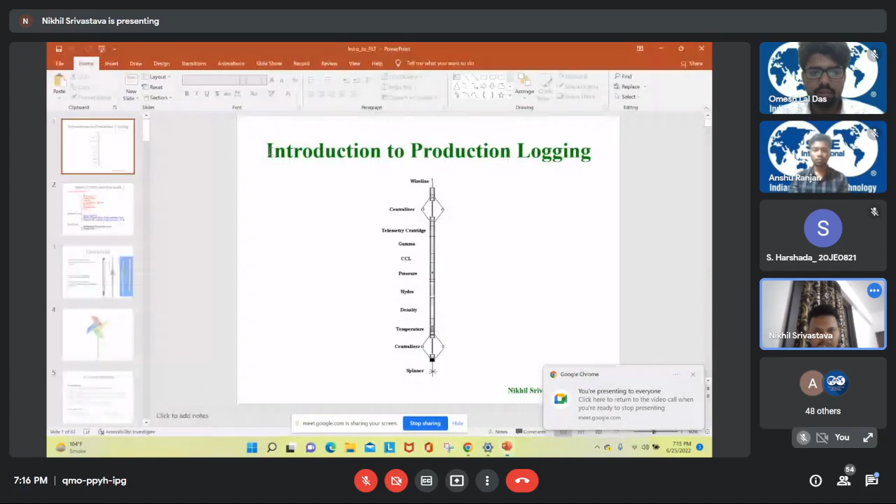Okay, I have stopped sharing right now. Shall I start sharing again? Yes sir, your entire screen. Okay, I have already shared my screen. It is presenting my screen right now. So can you see right now? Yes sir, clearly.

So I hope you guys can see this tool stack in the introduction slide. This tool stack has a few tools which are actually important in the industry. These are conventional tools basically, and most of its use is right now prevalent specifically in ONGC, and a few of the advanced tools are also there, which Schlumberger and Halliburton sort of companies provide, and a few assets like the Mumbai assets of our ONGC use it. I can share the technology of those advanced tools as well.

But the log and interpretation part, I could not share with you guys in this presentation because of some restrictive policy of ONGC right now. They cannot share the logs, and other specifically advanced logs of crucial areas like Bombay High, etc. So for that matter, I could not arrange that, but still we would look into the technology and its working principle.

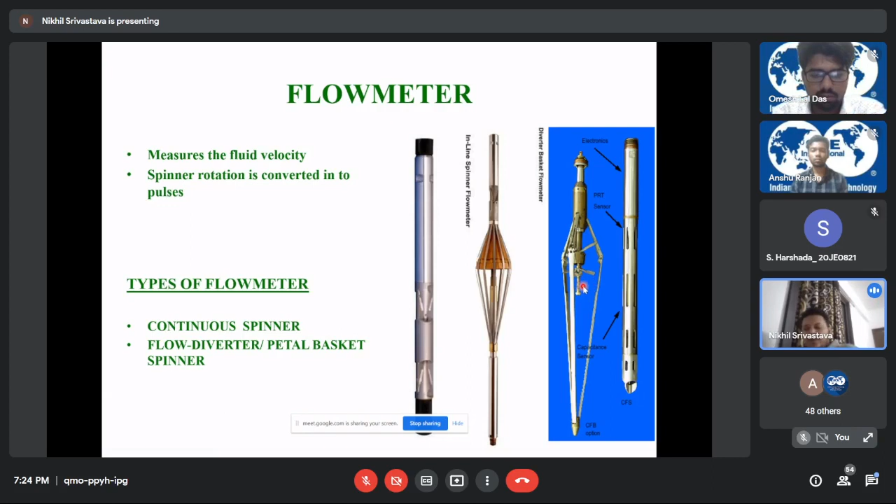Moving on to the next slide. To understand it better, you guys might have seen this paper windmill craft, which we all would have made in our childhood. Considering this, all the flow meters have four blades like this only.

What we would do in childhood is make it and run against the wind, so that it revolves faster and faster. We would run against the wind, and that's how we would play with it.

In a similar manner, if you think of this full bore meter, just sit on that full bore tool, and think that you are running with that full bore meter into the wellbore, and with that you can think of the revolution this spinner is doing in that manner.

One thing I want to mention here is that these tools are basically analogous to the medical field, just like radiologists do, or some diagnostic studies that are being done in medical study.

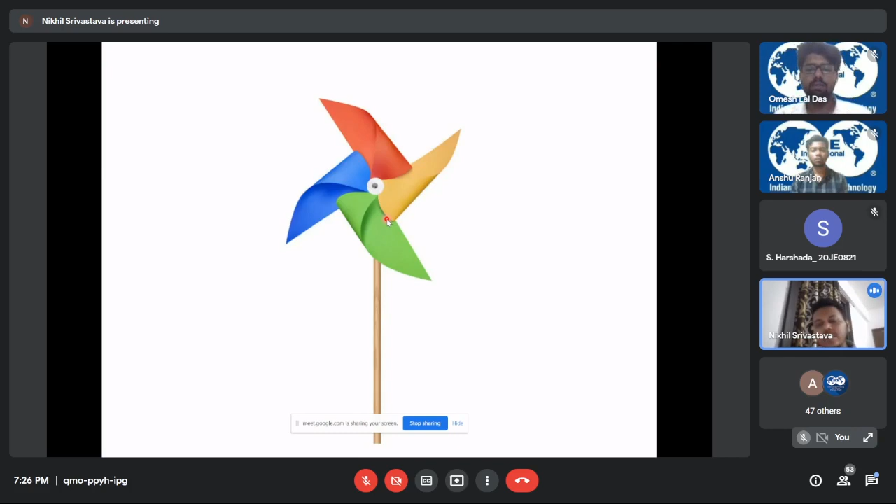You can think of these full wellbore meters as tools just to diagnose that, and after running them, interpretation of the data is very important. So moving on to the next slide.

Just imagine we are running the full bore tool into the wellbore. As soon as fluid faces this spinner, the spinner will start rotating in the clockwise manner. Industry-wide practice is to conventionally put this in the positive quadrant, so it's given a positive sign. When wind blows from the back, like a paper windmill, it will start rotating in the anti-clockwise or counterclockwise manner.

Similarly, if you sit on that tool in an injector well where liquid is coming into the wellbore, you will see the spinner rotating in the counterclockwise manner. That sign, by industry-wide practice, we take as the negative quadrant, so it's negative.

The measurement we get from this flow meter is pulse per revolution, which tells us how much it rotates. This spinner has a pitch, just like nut and bolts have pitch. One rotation of 2 pi r gives a measurement of one pitch, which sends a signal to the electric wireline telemetry that one pitch, meaning one revolution, has been completed. That's how it works.

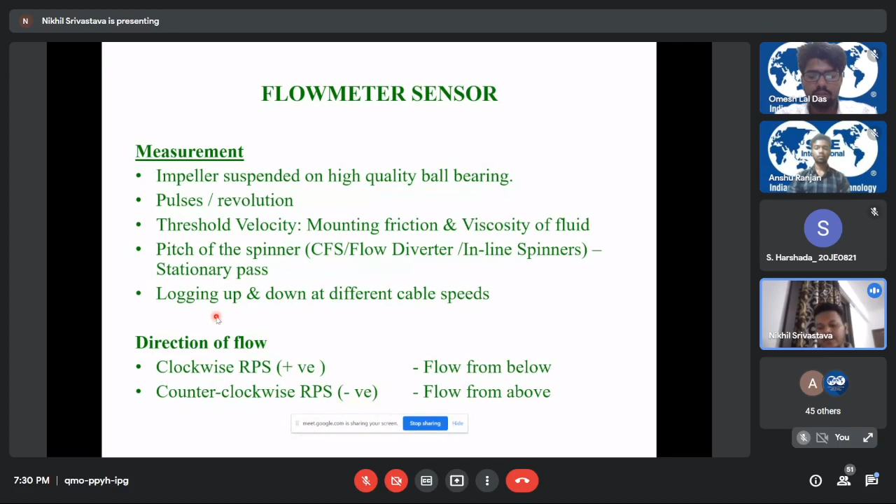Suppose there is no friction and no viscous drag force happening. What would you see when the tool is going down? Tool velocity down means the tool is going down, we are lowering it into the wellbore. As we lower it, the spinner will start rotating since there is no viscous drag force, so the revolution will be fine and proportional. Similarly, on the upward side, as I told you, this will be in the positive quadrant when we'll be going down.

This convention has been made in this calibration also. When the tool will be pulling up, similarly the revolution will be in the negative side, but we'll be seeing that it is proportional.

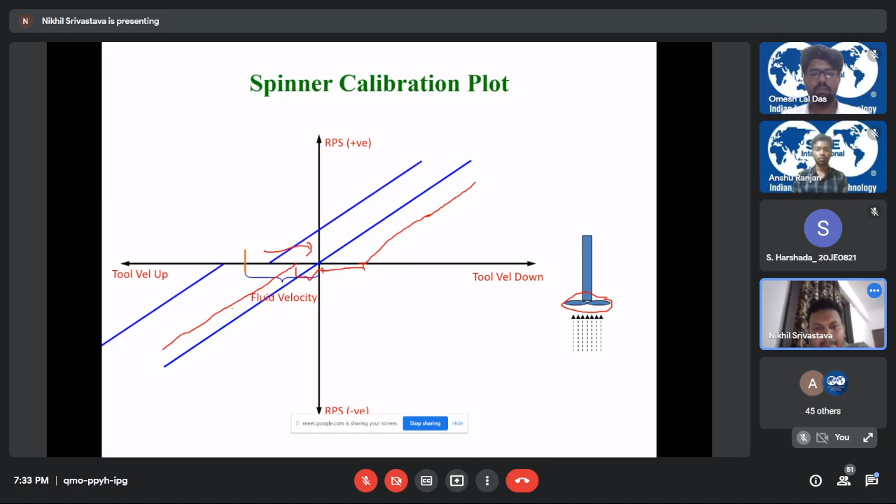In the next slide, I have shown that it actually varies with the fluid form, meaning what kind of fluid is in the formation. So for water, at the same tool speed, this revolution will be higher. For gas, this revolution will be lower.

Why? Because the viscous drag force that water will put on the spinner will be much higher. That's why the threshold velocity is low here. You can see the threshold velocity is some 10-ish here, and here it is some 5-ish. For that matter, gas is considered to have lower viscosity, so that's why it is giving a much higher threshold, and you can see the slope is a little bit steeper in the water case.

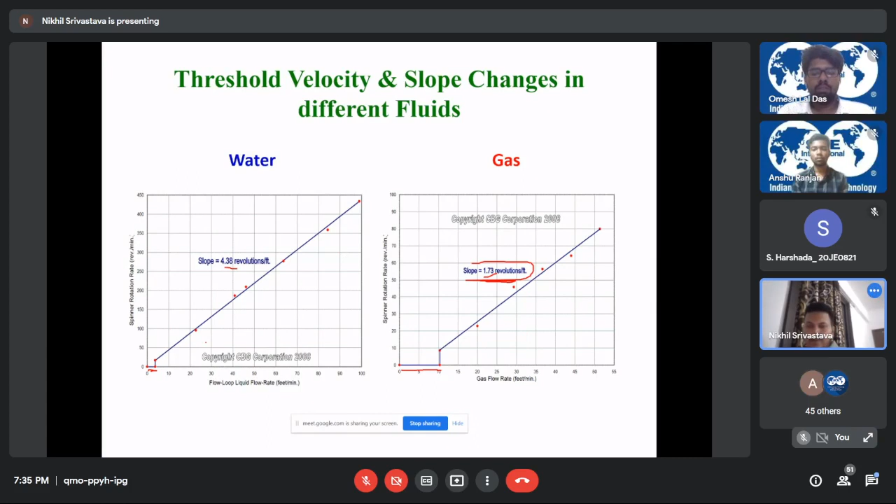It is not that gas flow rate is... you will have to have a lower spinner rotation for more gas flow rate. So this slide depicts that. For water and oil, it is not that much differentiable, that's why I've shown this slide for water and gas, because here it is clearly visible and clear.

These are the continuous flowmeters that we discussed in the first slide. This is inline, and there are some technicalities. I thought some geoscience background people would be here, so it would be important for them to know the limits of how these can be run, because reservoir engineers or production engineers in the industry give us a kind of requisition that you have to find out the problem.

So what we would do is first identify what kind of tool can be run, what kind of production is coming from the well, and whether the tool is compatible with that production or not. Such kind of things have to be decided by a petrophysicist or a logging field engineer. So in that case, it becomes important to know the tidbits of what your tool is, basically what its limits are. It works only for a threshold velocity of 10 feet per minute.

It works best for single phase flow, like if in the wellbore you are doing injection, it will be a very ideal tool to identify whether there is some leakage in the tubing or not, or whether some injection profile is proper or not. In that case, this tool can be run. In a production well also, if velocity is greater than 10 fpm, this can be run too. But mostly in the industry, it is being run in wells where tubing related issues are there, so that in those cases it gives us a better idea of what is happening in the tubings.

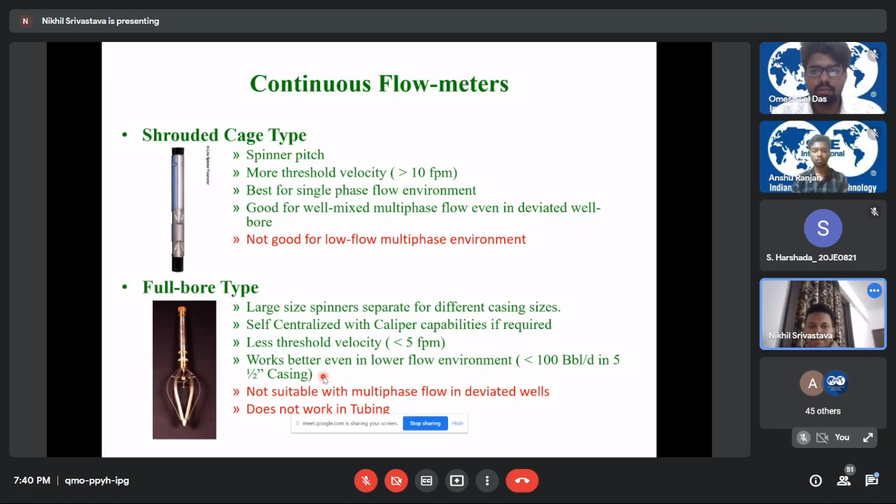But the one problem it faces in multi-phase flow is that the threshold of this spinner is a little larger. So in case of multi-phase flow, if it's gaseous, the multi-phase consists of gas, and in that case this full well bore spinner gives some kind of erroneous data. So we do not rely on it in deviated wells if it is multi-phase, and we rely on other tools. We'll see that there are other important tools.

This flow diverter, as I told you, is a motorized centralizer. This is good for low flow rate. As I told you, all the fluid volume once it extends, this particular central part works as the centralizer. So once it extends in the casing, you will see that all the fluid is going into this and it is being diverted, taking all the fluid volume.

But I would like to know from you guys, do you think it will give the true full bore flow rate? Because even if the fluid volume is coming into this particular spinner, the volume is significantly changed, so the velocity will be literally very high here rather than there. So in that case also, we do have some corrections and some industry-related empirical equations that we apply. You might be aware of this.

In physics, we would have read A1V1 equals A2V2, something like that. In the same manner, this is applied here also, and this velocity of fluid volume is calculated for the actual fluid that is in the wellbore.

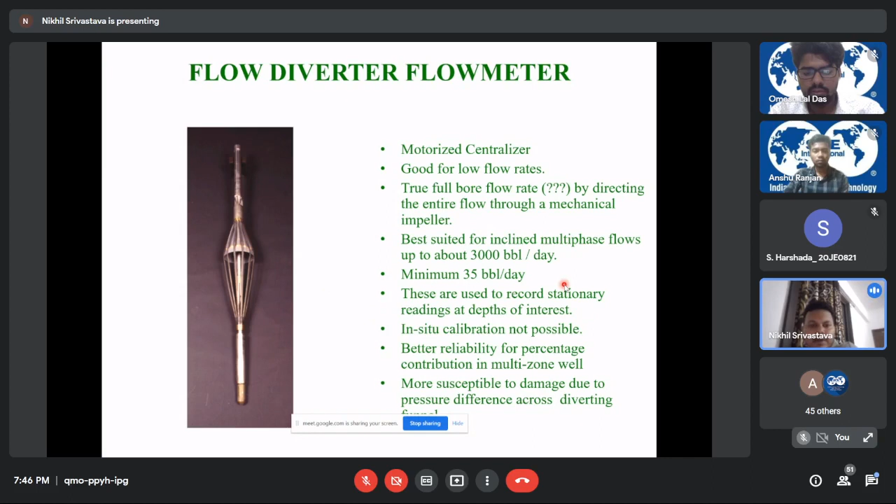As I told you, there are several perforation zones and you want to know the hold up, so it is reliable in multi-zone wells, but it is more susceptible to damage because it is motorized. Once it's in the wellbore, you'll totally have to rely on the motor mechanics of this tool.

So it might fail some of the time because well behavior is sometimes very unpredictable, and the flow patterns too. Let me show you these two kinds of flow: laminar flow and turbulent flow profile.

Generally, what happens is that our fluid in the wellbore, if it has pressure, you will find a kind of turbulent flow profile. For laminar flow profile, it is very rare - only when your flow velocity or the pressure in the well is very low can you think of having a laminar flow, near to laminar flow, but it is a very rare phenomenon.

Mostly we find the turbulent flow, so we do have to correct. What we are actually calculating is the fluid velocity, and eventually the fluid rate from that fluid velocity. So to calculate that fluid velocity, we would have to have a kind of correction.

This spinner is calculating the velocity of this particular area only. It is actually not covering this area or this area. Here also it is not covering this area or this area. So considering this as a kind of limitation, we would have to calculate the average velocity.

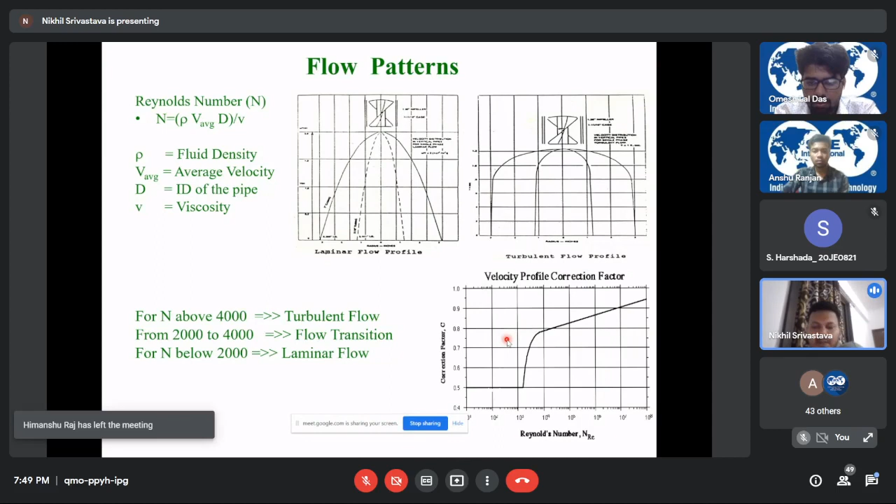Mostly in Mehsana, as I told you, it is 0.83, and it revolves around 0.6 to 0.9 for most of the fields of Mehsana and Ahmedabad.

So this is the flow meter environment. Fluid comes in different manners as they have different density and viscosity - these are intrinsic properties you cannot change. So there is a kind of mechanism that they follow to come up to the surface.

If this kind of flow is there, there are bubbles of gas and oil that you can see in the water. This kind of flow is called bubble flow.

And slug flow - when the viscosity of oil is a little bit higher, in that case it will come out on the surface in the form of slugs. It will be coming out in lumps, then water will come, then again a lump, then again water - it sort of comes like this only.

Again, when it comes in a little cruder manner, this is churn flow. We do not see this in Mehsana. Slug flow is very common, and bubble flow is also very common.

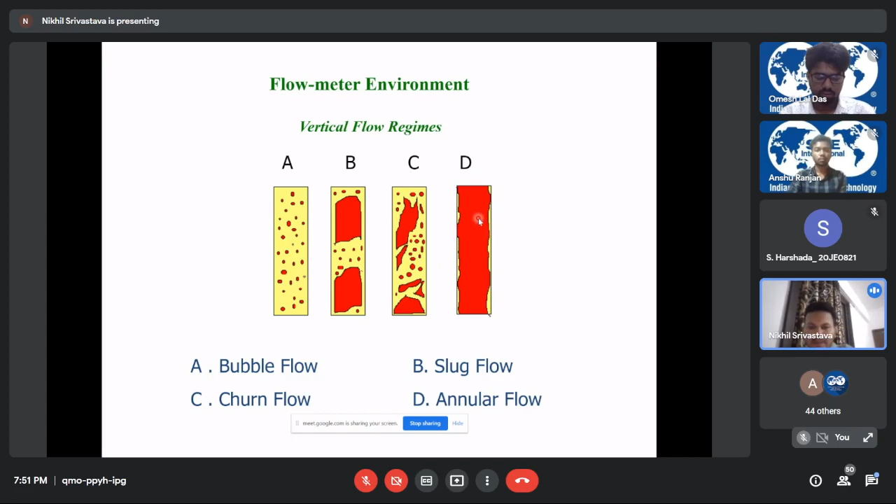Annular flow is basically when you have very low water hold up - in this case water will be seeping from the sides, and the whole volume of oil or gas will be coming from the middle. We see such cases also in Mehsana.

So there are problems in the deviated wells while running this kind of flow meter. You can see here that the perforation on the upper side is actually giving the production in the well. But what happens then if you have a sump below this particular perforation?

You will be having a kind of convection in the fluid flow volume. This will be coming from here with force, and after coming to the tubing packers, it will again come down to the tool. As it is natural due to gravity, the tool will be running on the lower side. So in that case, you will see that the tool is giving erroneous data.

Like you will be seeing that revolution is in the negative direction, and that too will come on your log profile. You'll be thinking that when centralizers are put here, what is the reason that this happens?

But this convection happens in the whole well, because on the upper side, due to gravity, the gas and oil go to the upper side, and that's why it comes below after touching this packer. This convection gives this kind of effect, and it gives the interpreters the understanding that some kind of injection is going into the well, but that is not the case.

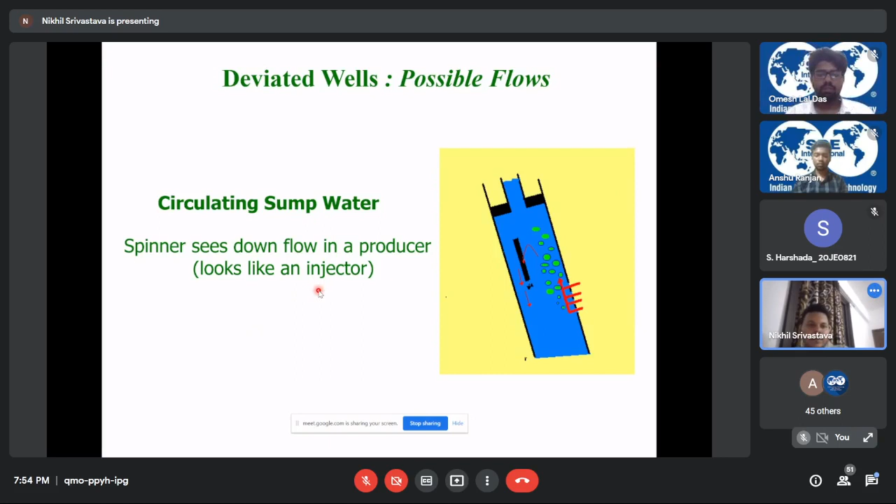But industrial tools are also being developed, and they take care of such kind of things, correcting it right there in the wellbore, and we do see just the positive response in those tools. So you have to give prior information of production, that yes, the well is in the producing profile, so circulating sump water, yeah.

Next, in the deviated wells, as I told you, oil and gas being lighter will be flowing on the upper side due to gravity. So sensors like in the hold-up hydro tools and density tools will give erroneous data, because they will not read the gas and oil as the average.

If you average it out, they will give mostly the correct order, but this is not the case. So in this kind of deviated wells, we do run some specific tools, as I told you, the inverted basket flow meter is a suitable tool to run in such kind of situations.

In this case also, you will not see that it is producing, but that is not the case. Again, such advanced tools, like the flow scan or something similar, will know the real scenario in this.

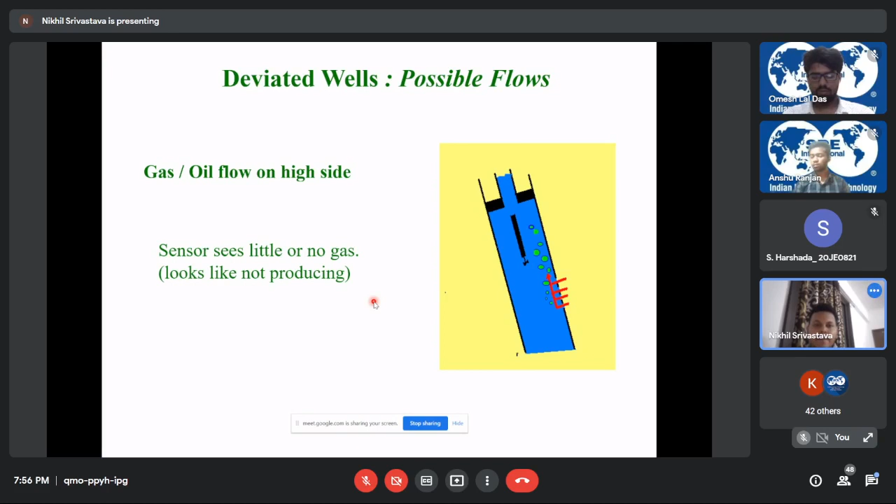That's why in such cases we ask Schlumberger and Halliburton to run special tools to identify whether there is an actual problem with the well, or there is no problem at all. It is just that the interpretation of conventional tools is somewhere compromised with the limitations.

So looking at limitations, we already discussed that threshold velocity limits the sensitivity of the flow. You have to have the threshold velocity that can run that flow meter, and velocity correction must be done with the Reynolds number calculation.

Noisy response due to type of flow - in single phase, noise will not be very much, but in two phase or multi phase flow, noises come in a manner that actually confuses our tool. For that we do have kind of remedies, but conventional tools do get confused with multi-phase more often than not.

Response in the deviated wells - we discussed already that due to fluid segregation from gravity in deviated wells, these conventional tools have limitations and calculate erroneous results. We must be careful, and as a logger, we recommend the requisition team from subsurface or other authorities, so that we can run other advanced tools from third parties like Schlumberger and Halliburton that have array tools and flow scanner tools that can give the whole picture of the well.

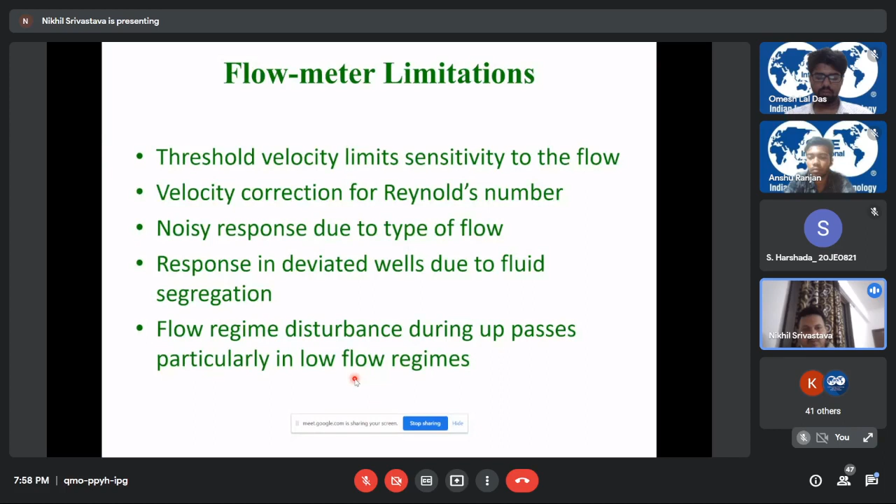With the production velocity, the fluid and the tool are also running in the same direction. So if a low flow regime is encountered, the spinner fluctuation will not be that much, and we will not be able to identify whether the fluid is static or actually coming from the wellbore. So in the up passes, we have to be careful to know that the production is good, more than 35 barrels per day or so.

Coming on to the next tool, that is the temperature tool. The temperature tool is basically a resistive thermal device, a non-conductive surface on which a metal, mostly tungsten or platinum wire, is bonded. It measures the change in resistance with this tool, and that change in resistance per degree Fahrenheit is recalculated to get the temperature.

This is a very awesome tool to know many of the things which a full bore flowmeter or diverter tool cannot give, like channeling behind the casing. This is a very basic and ideal tool to run to know such kinds of problems in the well.

It measures the absolute temperature. Temperature accuracy is very good, up to plus minus 0.2 degrees centigrade. Resolution is 0.1 degree centigrade.

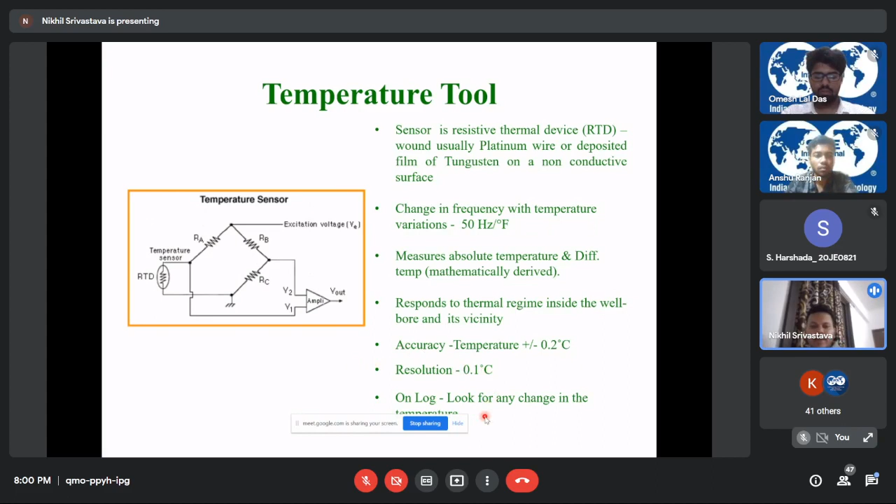In temperature logging, we take care that we always log it while running the tool down. We never run it while pulling the tool up, because there is no telemetry that can tell the temperature tool that you have to record now and you do not have to record now. It is just a simple device which is resistance based, and it calculates the difference and gives it in the form of frequency, which is then recalculated in the form of temperature.

So once your tool is down, it has already measured all the formation temperature. Your tool is conditioned with the temperature at the bottommost point, and when you take the up pass, this will not give you the geothermal gradient idea. In that case, you may get results, but you cannot rely on them, because every temperature curve that we log into the well is tied with the geothermal gradient.

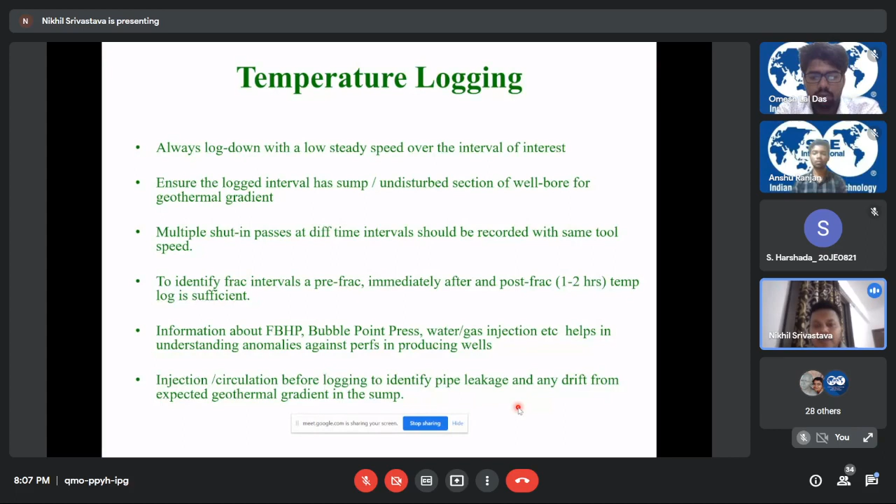Injection and circulation before logging helps identify pipe leakage. So suppose workover engineers and other production engineers have circulated some liquid or done some injection before running this temperature log. If you ask us to run the temperature log right after that, we would avoid it, because it will not give us the correct idea. Right after injecting or circulating the liquid, it disturbs the temperature equilibrium, and that will not give the proper anomaly. In that case, if you give us some time, like 4 to 5 hours, you can wait with your colleagues, and then we can identify the pipe leakages and any kind of problem happening due to poor latch of the tubing or something. So we can identify that with the temperature tool.

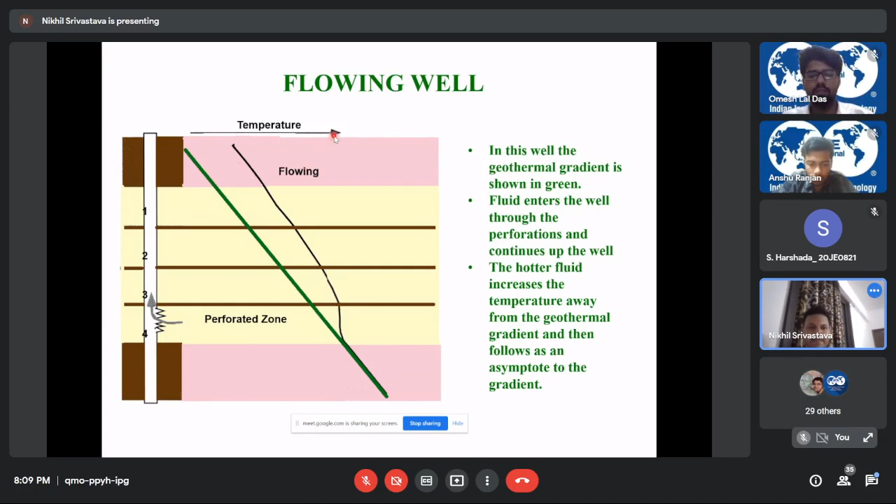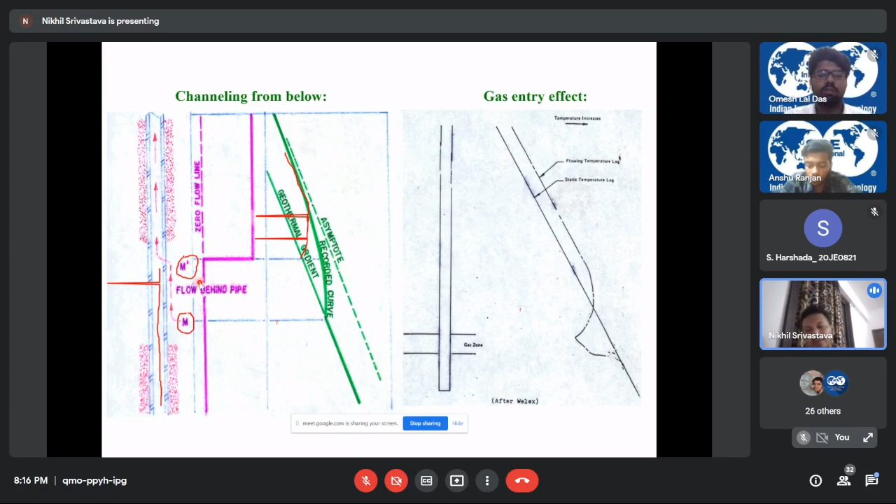That is always welcome, but the thing is that if it has suddenly gone from 3 meter cube per day to 30 meter cube per day, there might be some reason. So for that we can run this kind of production log and know the reason.

In case of gas channeling, you cannot identify it from the flow meter, it will again show just like that only. Due to static fluid run, there will be some RPS, and again it will increase against the perforation zone, but temperature will beautifully show you the cooling against this, where channeling behind casing is being done.

Again this will increase and try to attain the formation temperature, the formation geothermal gradient. But as you see, this gas has started coming from behind the channel, and here adiabatic expansion has started, and you will see again a cooling profile, and then it will go on increasing into the wellbore.

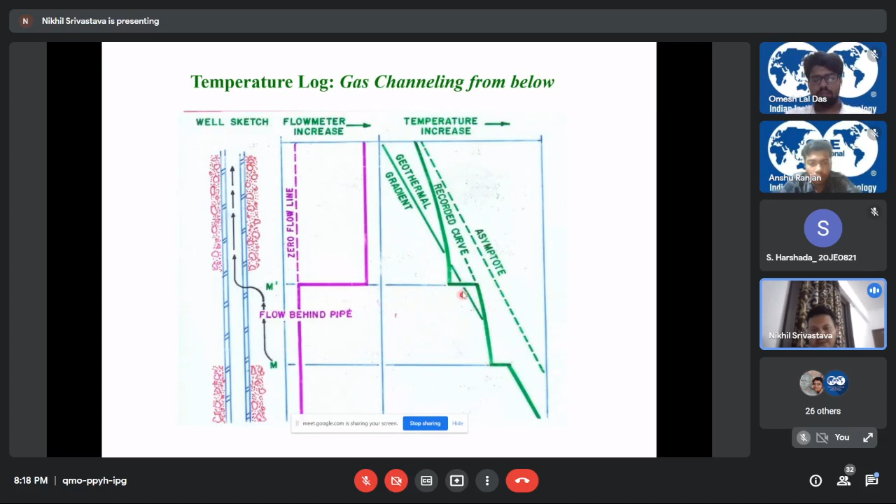So these two anomalies will tell you that yes, channeling is being done into the well behind casing.

There are other cases where you can run this temperature tool and identify casing leakages. Casing can leak due to several reasons, like corrosive gas coming in, or casings being very old and due to rusting it has got corroded, and there might be some contribution from that particular leaking zone.

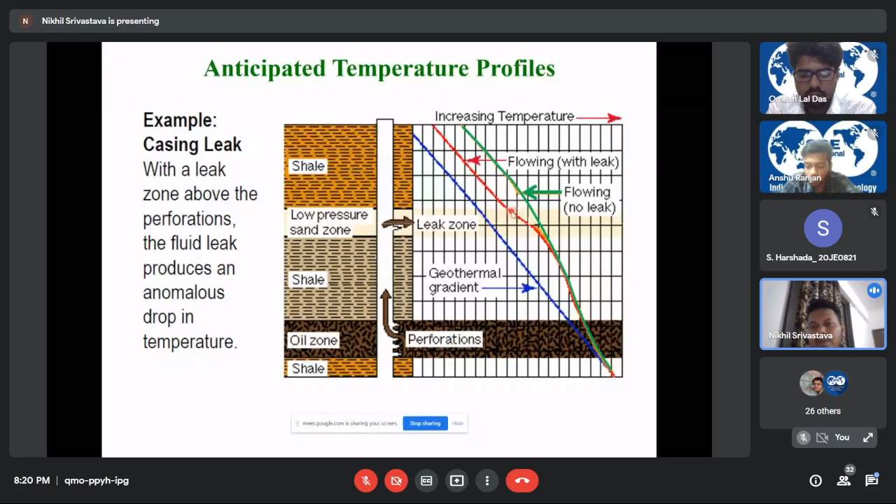This tool has a limitation that it will not give you holdup of water beyond 40% water cut, because in that case it will totally read the capacitance, dielectric constant of water, and this will give a kind of erroneous result that water is coming, 100% water, there is no oil. So there is a limit with this tool that you have to have less than 40% water cut.

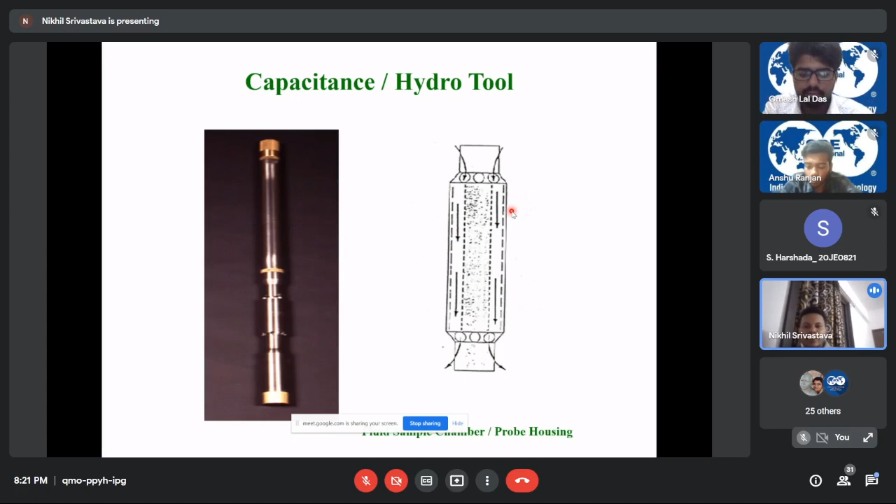In that case, a mix of liquid oil or gas with water will come, and this will identify the average dielectric values. Here you can see that for water, the dielectric constant is very significant, and it is not very identifiable between gas and oil, so gas and oil cannot be segregated, but water can be segregated from the hydrocarbon. So this actually can give us water holdup, but it is best suited for less than 40% water cut.

This tool basically works on the principle that there is capacitance, and due to the intrinsic dielectric constant parameter of every fluid, this capacitance changes. The output we get is in the form of frequency, which is converted to the holdup using an empirical equation on the surface when we get the log. The sensor is basically a kind of isolated metal cylinder with a Vespel sleeve inside, and there is a capacitor in it; between this, when the liquid passes, it measures the dielectric constant.

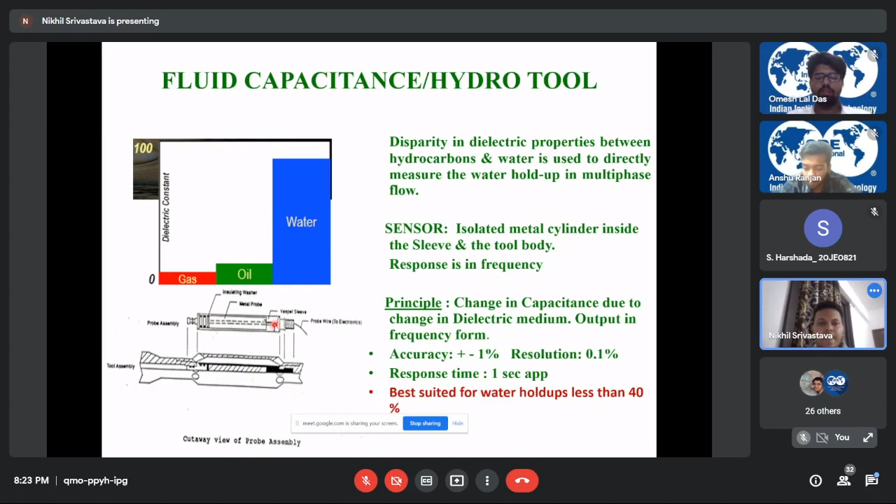That's it. So the tool principle is basically needed for people with a geoscience background. As petroleum engineers, you just have to know from the industrial point of view whether this tool will give you the water holdup, and that too for less than 40% water cut, which is nowadays very rare. Such cases are very few in brown fields like Mehsana and Ahmedabad, where water cut has gone beyond 60% or something. So this tool has eventually become obsolete, but we do use it in crucial wells, as I told you.

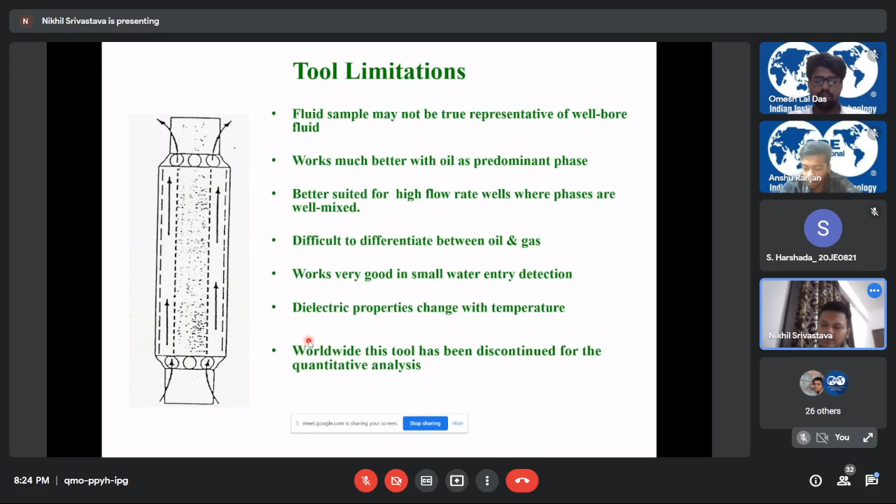So this is the fluid density tool. We have a density tool also, which is based on radiation and pressure difference.

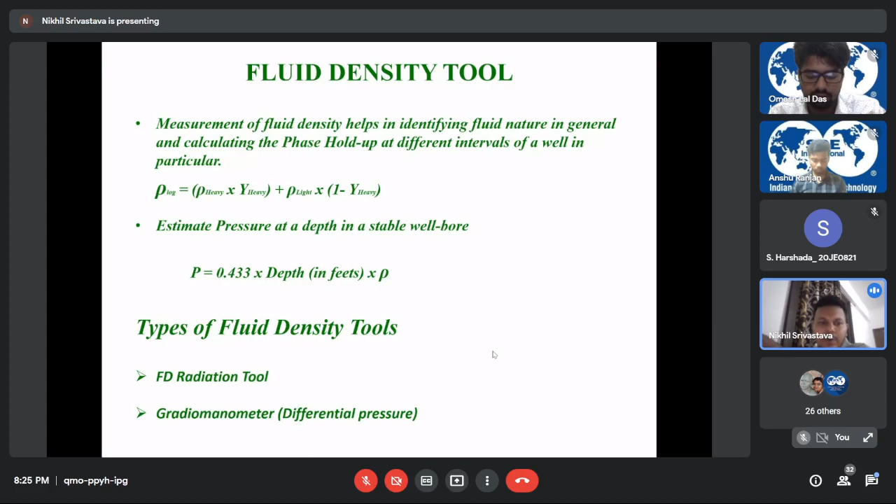The fluid density tool we use in Mehsana is of radiation type, and we use cesium 137 for that purpose. This is the empirical equation that the tool follows; we just have to run it, and it gives the bulk density.

This is based on the Compton scattering effect, where the gamma released from the cesium 137 source is bombarded on the fluid, and due to Compton scattering, it gives inelastic scattering. The gamma released from that scattering is recorded in the gamma detector. This gives the intrinsic property of the fluid in a way that there is an energy spectrum for those fluids, which is very unique for water or hydrocarbon.

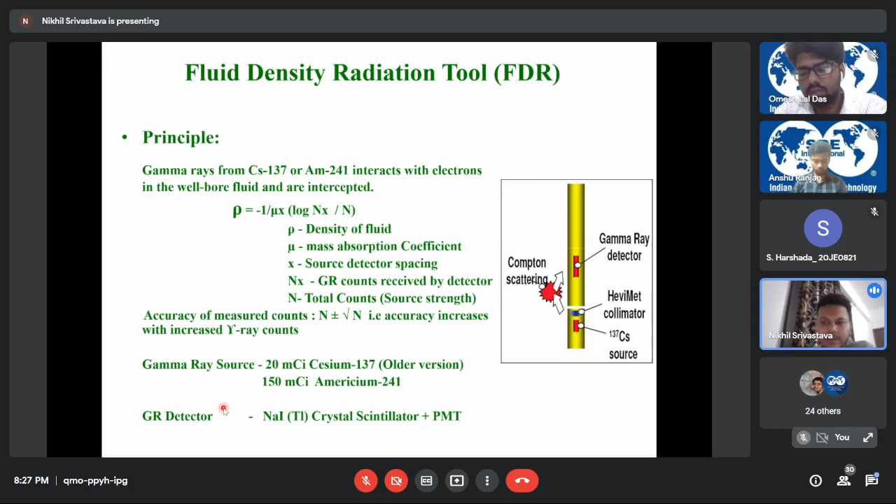For oil and gas, this tool measures density of fluids using a particular formula based on tool physics. This involves the mass absorption coefficient and source detector spacing. NX is the gamma ray counts received by the detector, versus the total counts, which is what the source actually bombards into the wellbore. That total count is based on the radioactivity of the source.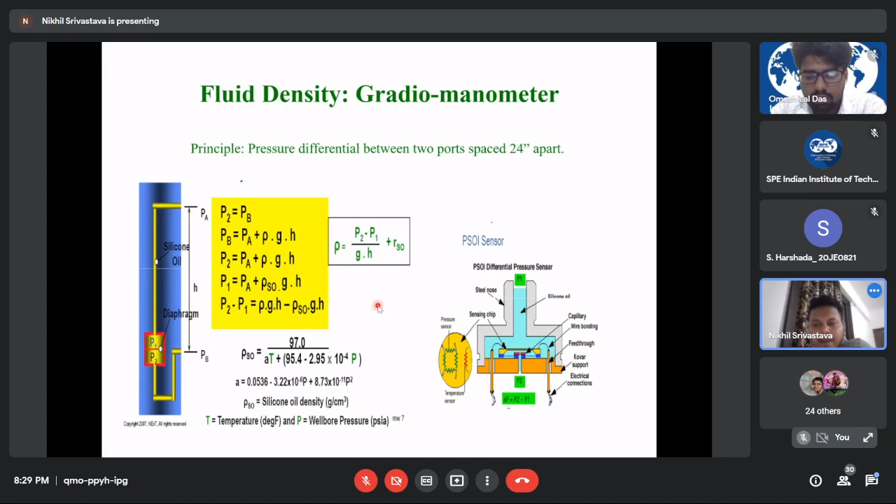If the density of oil coming onto the surface is known, and the density from the gradiometer has been calculated, we can also calculate the water holdup with this. In this case, we have a graph showing density of oil and the water point where 100% water holdup occurs. Once we calculate rho from the gradiometer, since this is a mixture of oil and water or gas and water, this gives an idea of how much water holdup is there. So this is one way of calculating water holdup.

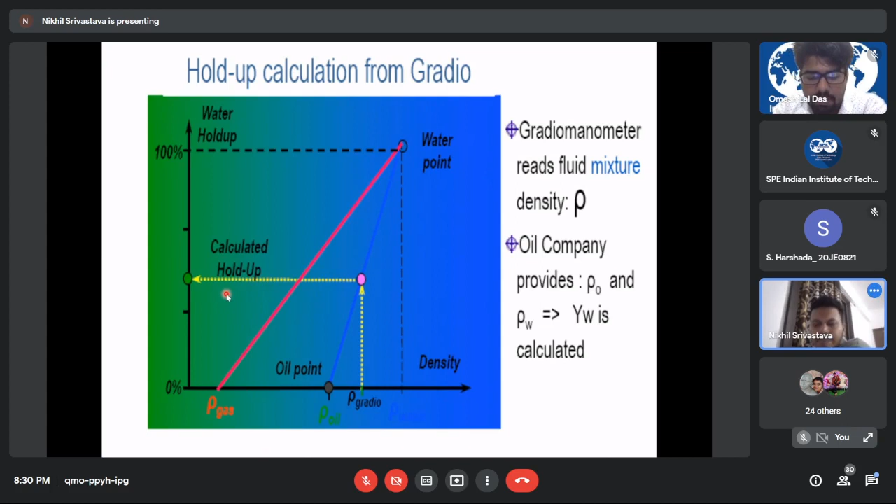But the gradiometer is not being used in the western region of ONGC, so I cannot comment much on that. The gradiometer is suited for vertical wells of low deviation, and it does not have much accuracy.

That's why we have purchased the radiation tool, which is equivalent to the density tool that is run in the open hole, if you might be knowing. So that is equivalent to that. Though the gradiometer is more rugged, and it can be run in almost any condition.

One important thing is that the gradiometer does not have any radioactive material, so organizations like BARC and other regulatory authorities don't require us to take their permission for it, unlike radiation tools. Every quarter, we have to take permission on whether we can run this kind of radioactive tools or not.

There are some regulatory bodies, like BARC, that keep records of this. It is just to control the radiation hazard that these regulations around radiation tools are important. We have to give the information about such tools to the authorities before running them into the wellbore.

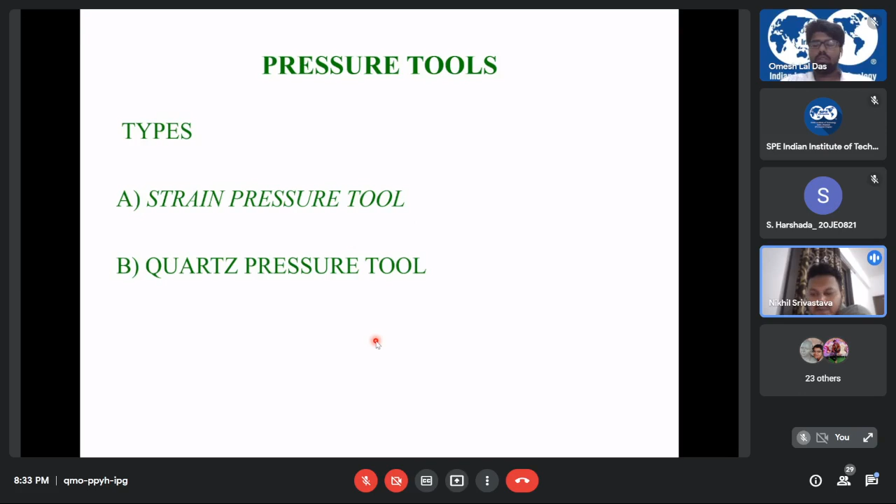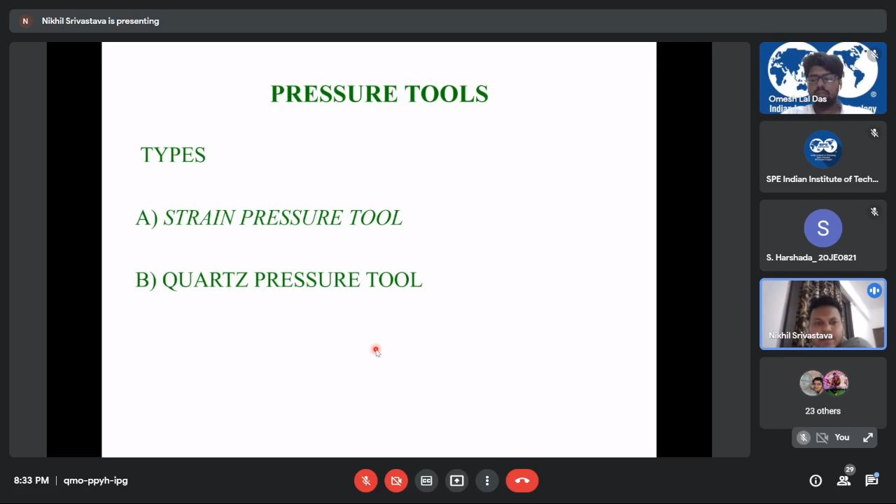Pressure tools include strain pressure tools and quartz pressure tools, two types that measure pressure in the wellbore. There are other methods that reservoir field services use, but nowadays in industry, the quartz pressure tool, which works on the principle of the piezoelectric effect, is mostly used. Strain pressure tools were used earlier but are not much in use now.

The principle is basically that the pressure-induced strain in the sensor causes a change in electrical resistance. That electrical resistance is recorded and sent to the telemetry, and through telemetry in the wireline, up to the surface.

In the software, the resistance is being converted again into pressure. So accuracy is not good, but strain gauges are less accurate, as I told you, that's why they are not being used much in the industry now.

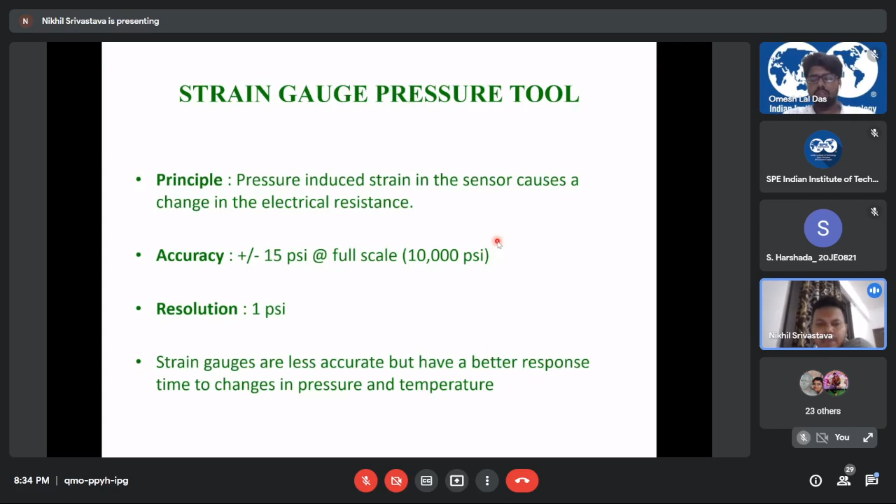Its response time is better because if you are having low flow volume, you would need a better response time to measure that, and strain gauges give that. In case of quartz pressure gauge also, you can use a strategy where you run it a little slower in the borehole where low liquid volume is coming out, so in that case you will also get a good response.

But that is a limitation, that this tool's response time is a little on the upper side. So you have to be careful to measure the pressure, and just slow down your running tool, and that will solve these kind of challenges.

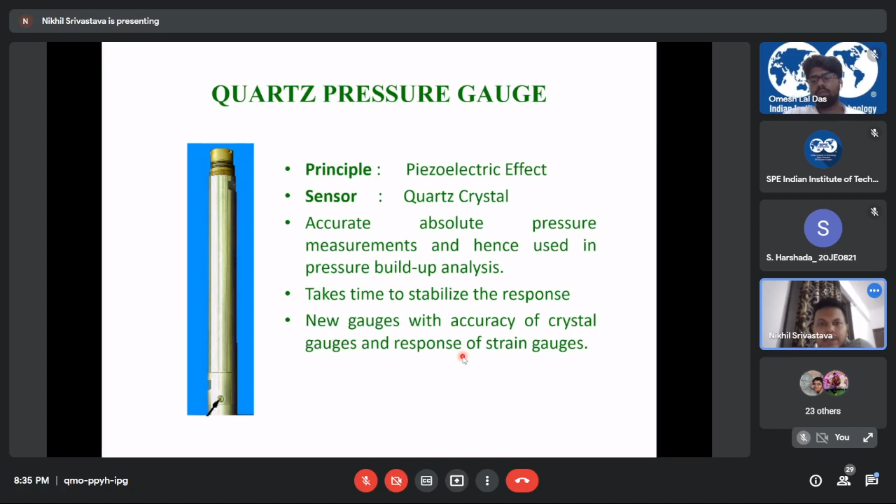Gamma ray tool is very basic. It has a scintillation detector. There is a natural gamma that every formation or every liquid emits. This gamma tool even records the gamma on the surface of the surroundings, but that gamma radiation is not very much of use.

That's why we correct for those environmental gamma, and we run this tool down to measure the gamma of the formation. This gamma is basically for the purpose to correlate the formation and tie up the depths, so that we know we are going right in the direction. That's why this tool is in the stack.

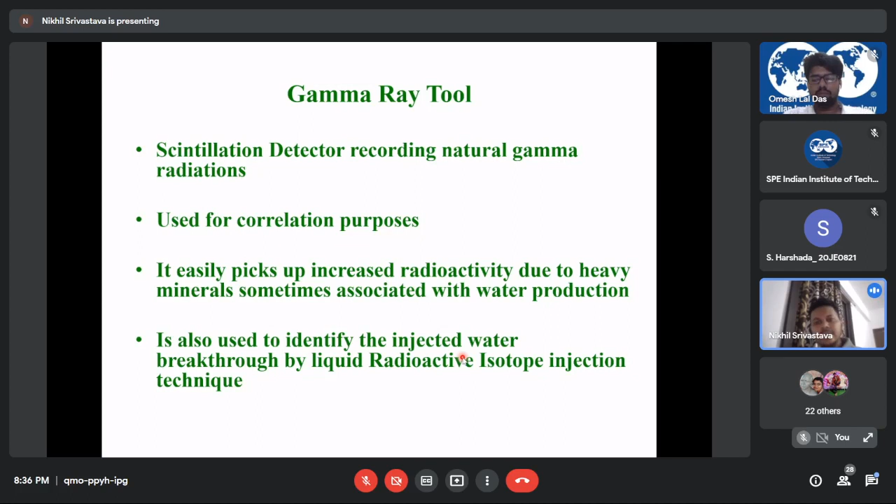Casing collar locator also gives the magnetic flux idea, and where the metal thickness is high it will give a larger magnetic flux, and that's how it gives an idea of casing collars, and also whether perforation is done somewhere, and whether there is a casing or tubing leakage. Some fluctuation comes in this due to the magnetic flux difference, but again that has to be re-verified with other tools.

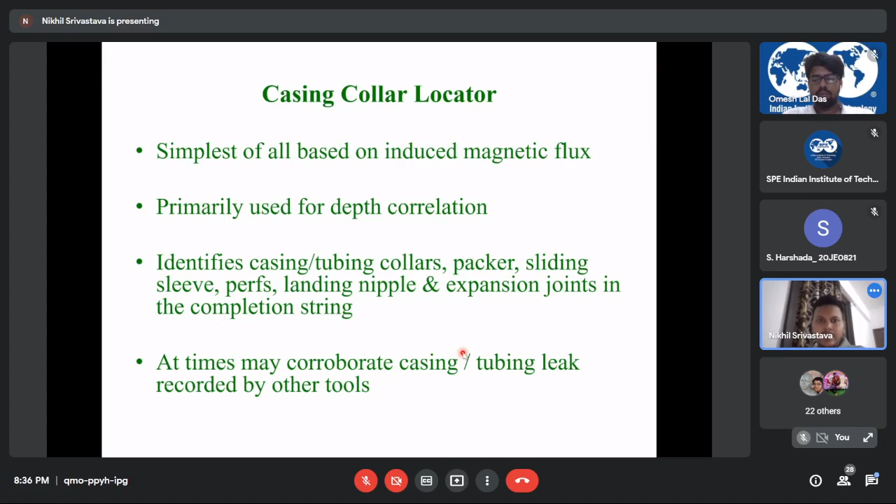This comes under the category of other tools, as I mentioned in the second slide. These radial differential temperature tools basically consist of two calipers, 180 degrees apart, with a temperature sensor mounted on these, and there is a kind of tool rotation that every tool has while running into the well.

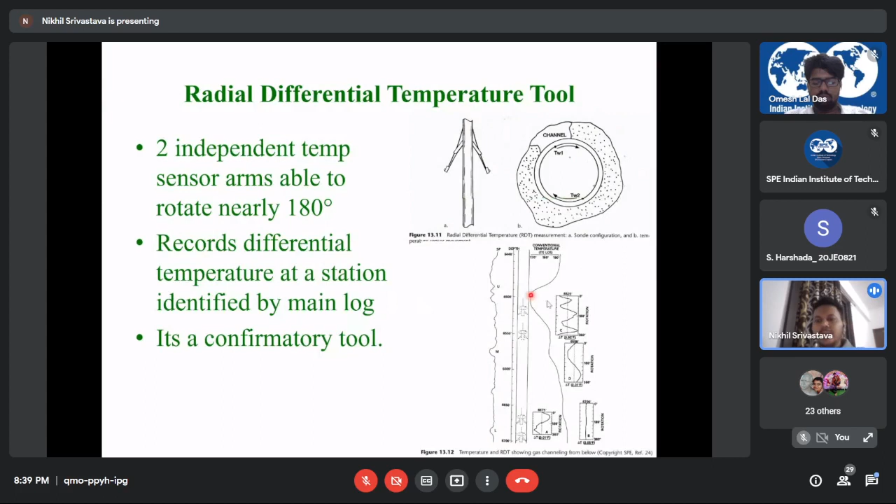Here there is a slight cooling phenomena, because the temperature slightly goes down, but again it has recovered. Here it is very straight, so there is not much cooling phenomena happening. This more or less resembles the temperature profile that we run with the original temperature tool, so this kind of tool runs for confirmatory purpose. There is no addition, but it gives a much better idea of in which direction the cooling is happening, even in the perforation.

Advanced PL tools - these four PL tools are widely known in the industry. First is GHOST, the gas hold-up optical sensor tool from Schlumberger, which is run to know the gas holdup. This is based on optical sensor flow view technology.

Time is actually a little less, so I would switch to the interpretation part, which is very necessary for you guys. I'm just briefing you on this. I will share the presentation with you so you can read it for the sake of knowing the tool principle. So this is based on optical sensor technology.

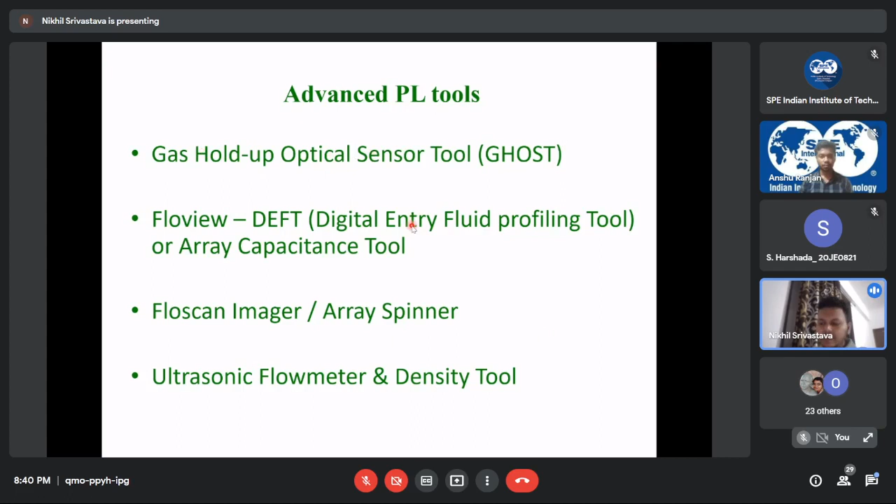What it does is, the flow of liquid into the wellbore is mostly in the form of bubble formation. So when the tool is run, a light source is bombarded on the fluid, and when this light comes out from the gas, water, or oil, it gives a certain refractive index. Because it reflects totally in case of gas, but in case of oil and water it is not very much identifiable, the refractive index of gas is very low, near about air.

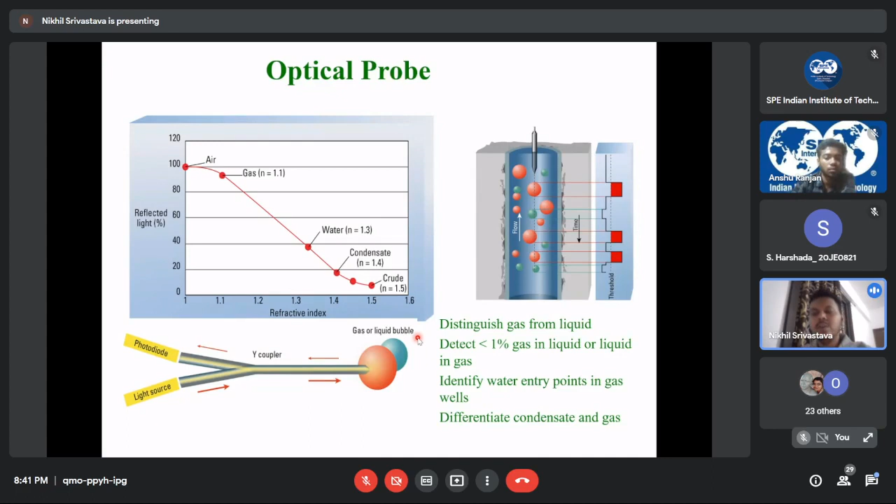That's why what comes out is the volume of gas, and that gives us the gas holdup. So in gas wells, this works wonders, and if one has to run a tool to know the solution gas in the well, this tool is ideal.

In digital entry profiling, there are micro resistivity tools mounted on the caliper. These tools basically measure the difference of resistivity between water and hydrocarbon, thus giving the holdup of water in this kind of multi-phase flow, because resistivity of hydrocarbon, whether oil or gas, will show on the higher side than water.

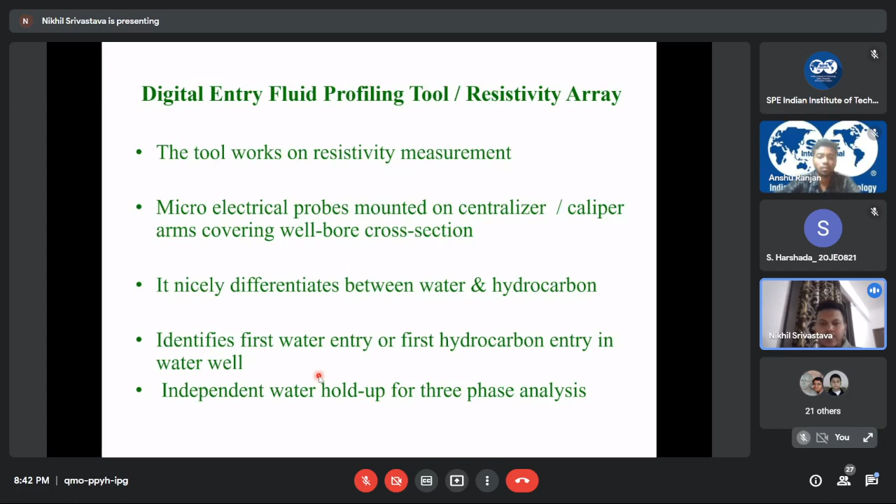So if the water is fresh - in case of freshwater formation, if it is coming from freshwater - then you would not get the water holdup properly. In that case the situation will be dicey, because water and oil would read somewhere equal, and it cannot give good results. So remember, the DEFT tool is for formations where the fluid water is saline, not for fresh water. Its working principle is the same.

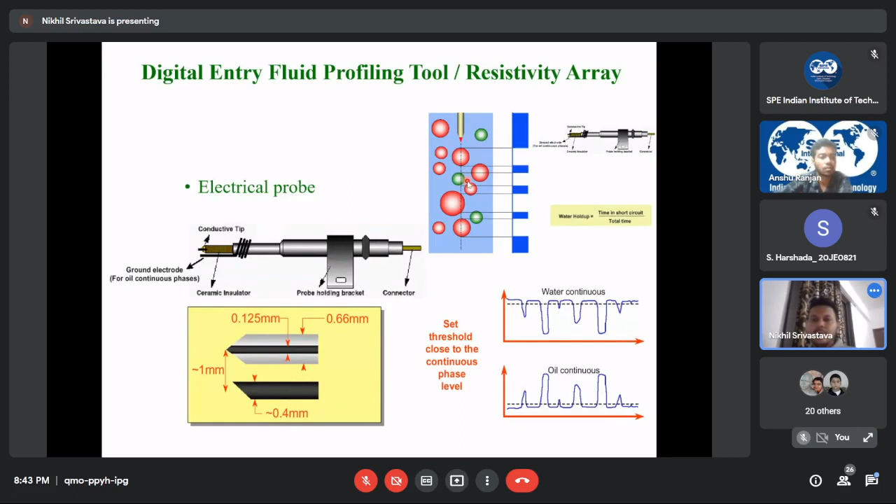Only in bubble flow, it will read the resistivity with different micro calipers, probe tools, and those resistivities are again converted on the surface into what kind of liquid is in the wellbore.

Flow scan has multiple small spinners on the caliper only, like this, and these kinds of arrangements give you good results in any kind of flow, in deviated wells, horizontal wells, or even vertical wells.

These kinds of tools are run in very crucial wells, where suddenly oil has stopped coming and only water is coming. So what could be the possible reason? Or is there some other kind of hold-up involved?

In case of what kind of holdup we are getting in the well, it can be run with other tools like GHOST and DEFT to know whether water or gas are there, and whether they are being miscalculated somewhere because of horizontal or ultra-deviated wells. In such cases, this tool will give you a fair idea that this is not the case - the well is producing, and we have to look for other remedies to identify the problem.

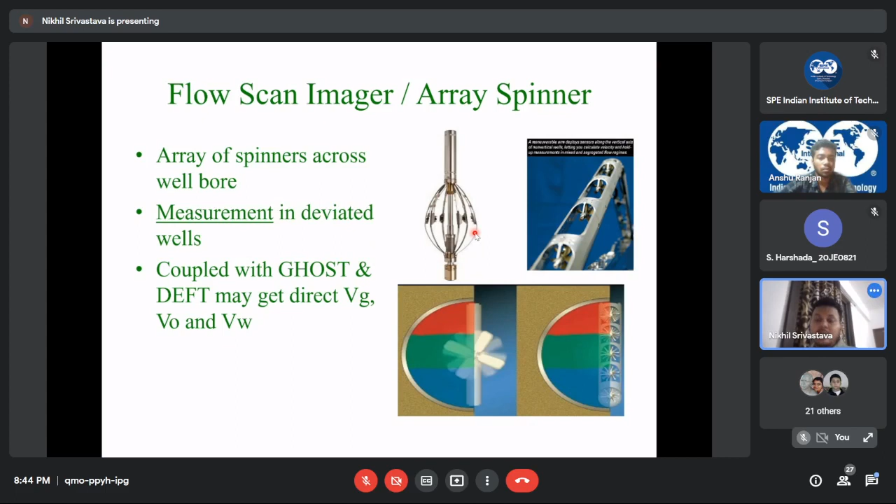For the problem, we would have to look for other remedies. Ultrasonic flow meter and density tool are run in the well together, because density and this ultrasonic travel time give the transit time as a function of density.

This tool was basically invented in Russia, and there they have a kind of transmitter and receiver setup in which the difference of travel time comes when it passes through the liquid, and that transit time gives the function of density. Thus this tool measures the density.

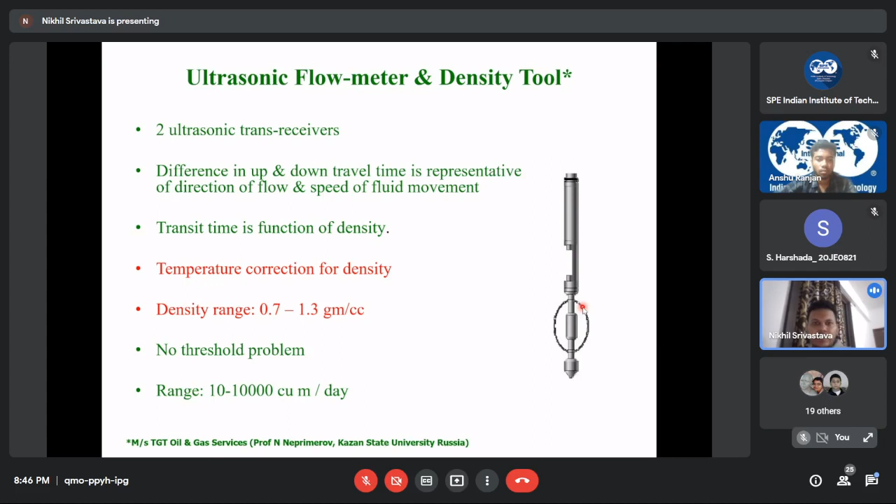Again, in this there is no fluid flow volume related issue, because ultrasonic signals can range from everywhere in the casing area of any casing size. So the range can be from as little as 10 cubic meters per day to as large as 10,000. That is why this tool is good.

Coming to the interpretation part, this is basically what we have to think about when seeing this interpretation. In this case, you have to first read the log carefully, see the remarks as a reservoir engineer and production engineer - what is being written by the interpretation team, what kind of queries they have found in the well, and the limitations they mention, along with their interpretations.

Read those remarks in the section of log, and see the tool stacks, well sketch, production data, etc., to actually know what is going on into the well.

You know the problem. Suppose you have a problem in the body, and first you want to know how this problem is coming to my body before going to the doctor or some diagnostic pathology lab. You want to know yourself whether I have eaten something, or worked out too much, and something has gone wrong with the body. You want to know that first thing.

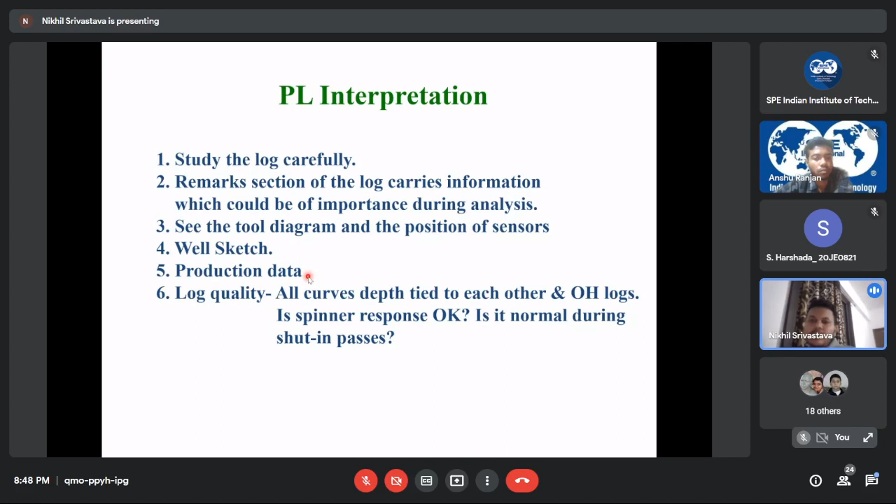So this might have created some kind of problem. If you give such kind of information along with the production data and workover history, that will be very beneficial for the people who are going to run the production log. And these are some checklists you can read out. I am going right away with the interpretation.

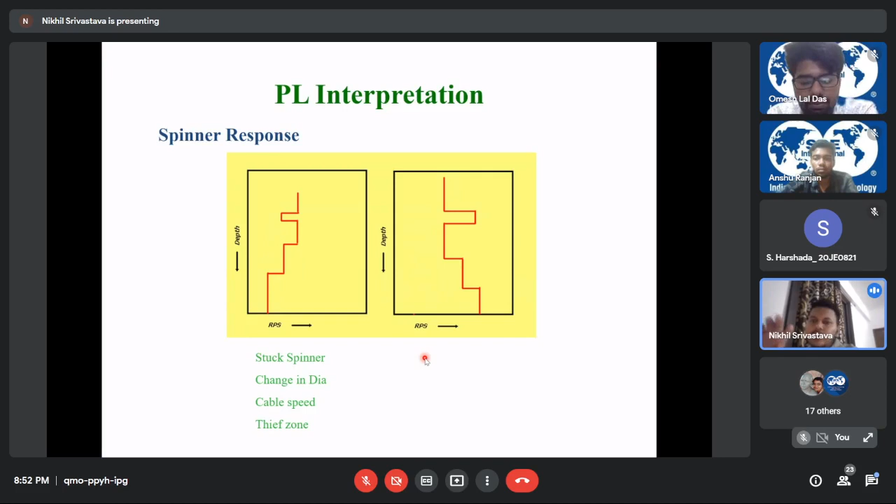And there might be other problems also, like if you are pulling up and suddenly the winch operator has stopped the truck, due to that there is a kind of sudden pulling of the tool that may happen, and due to that also this kind of erroneous result can be given, we may get.

So velocity, the fluid velocity that we actually calculate with the spinner, is with this formula. So RPS is positive, as I told you, in the first quadrant, while your tool is going down, and while your tool is coming up, it will be negative.

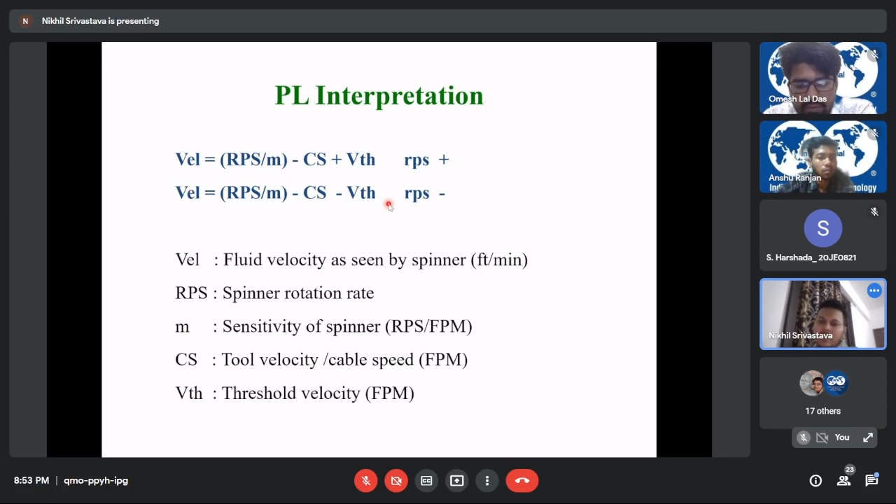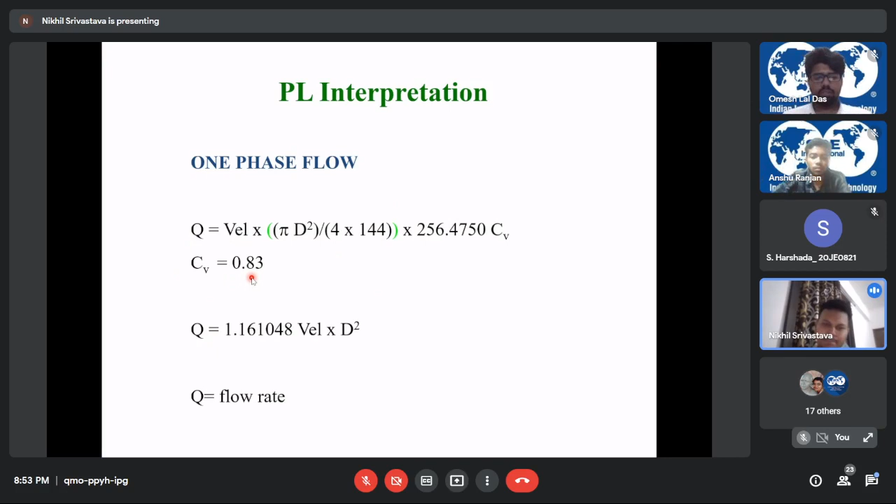This formula will apply in that case, and this is just because of convention that we follow. With this velocity, we calculate the flow rate Q. In case of one phase flow rate, velocity is multiplied by the cross-sectional area, D is the ID of the casing, and this correction factor comes from the Reynolds number we discussed earlier. We take 0.83 in case of the western region of ONGC, and this comes out as this value.

Somebody has opened their mic. Anything? No, sir, by mistake.

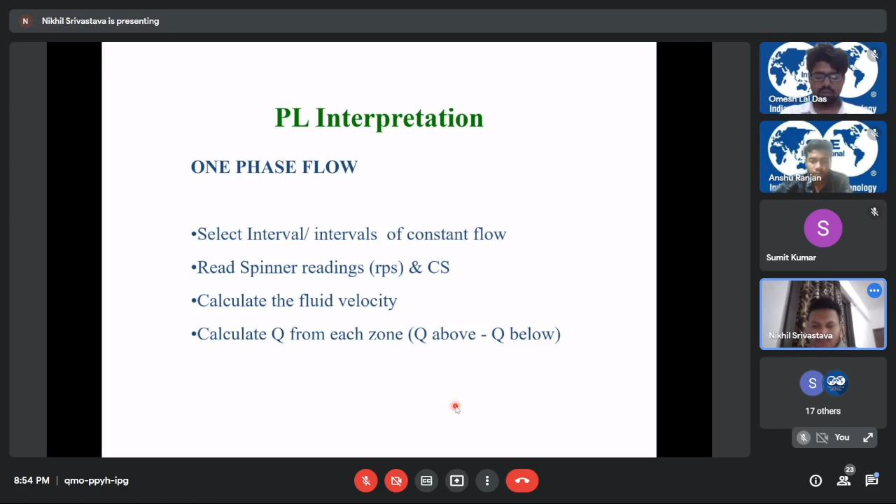So in case of a spinner log response, you can read it out here. Spinner readings generally decrease with increasing depth, in a down run in a producing well. If you are going down, your spinner generally decreases with increasing depth. Why does it happen?

When spinner readings actually generally decrease, it's not that straightforward. It is just that in a producing well you are facing liquid coming out from the production zone, but once you pass that zone, the fluid volume has suddenly decreased. So you will not have much resistance or viscous drag, and this minimum viscous drag gives you a decreasing profile of the spinner. Spinner rate increases with increasing depth in the injector well.

So in the injector well, it increases with increasing depth. This means that when you are coming up with the spinner, the pressure and fluid volume will be maximum at the bottom, so it increases in that case.

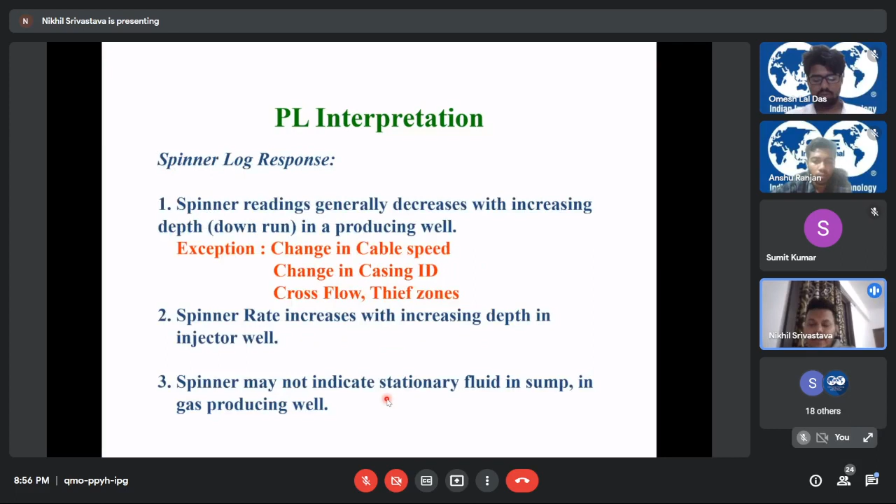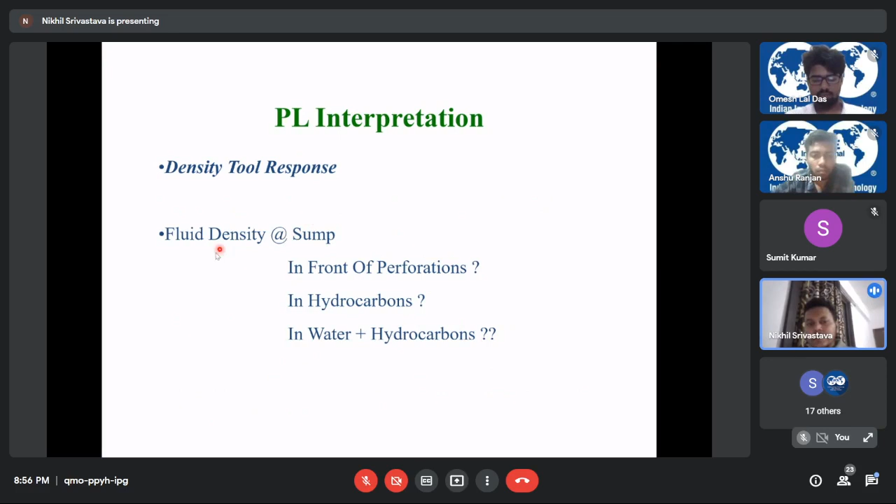These are common things you will see from the density tool response. In front of perforation, you will see the density response in case of hydrocarbons, and in case of an average of water plus hydrocarbons, this has to be looked at in the interpretation we'll see in the upcoming slides.

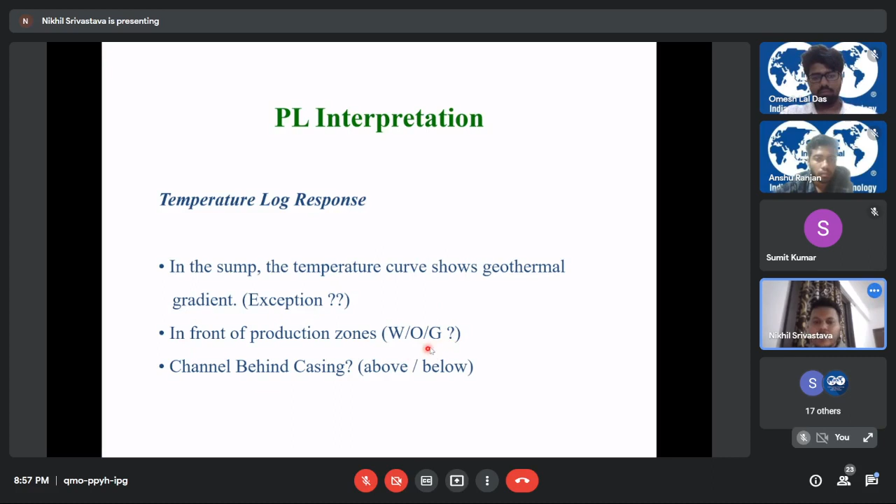In the temperature log, the sump temperature curve goes to geothermal. As I told you, the exception would be in gaseous production, where due to convection you will see a lowering of temperature below the production zone. In front of production zones for water, oil and gas, production will take care of it. We also discussed channel behind casing in the ideal cases.

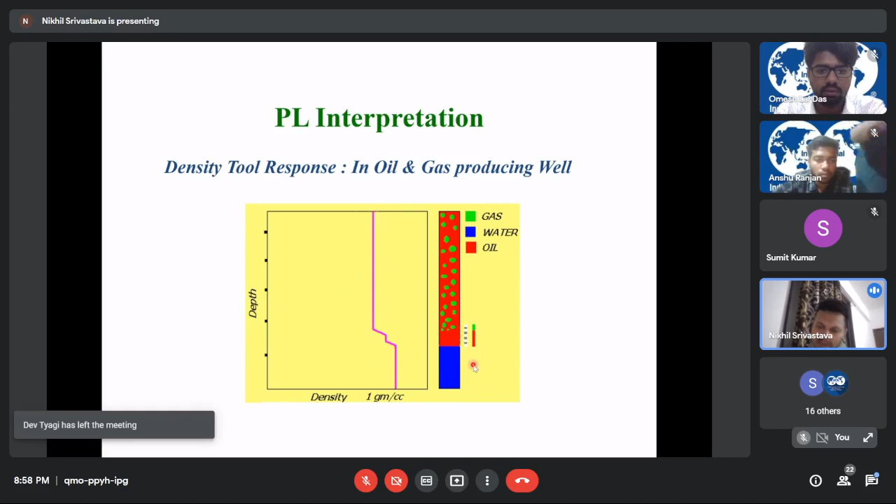The temperature log also gives the rate of flow, and here is how it can be measured. If production is happening from this particular depth, and you have a shut-in pass after 1, 2 or 3 hours, you will see that the temperature has decreased by a certain amount.

With that, an empirical formula calculates the rate. For a particular decrease in temperature, this much rate will be there for fluid coming out in the water. So there are kinds of empirical equations for this.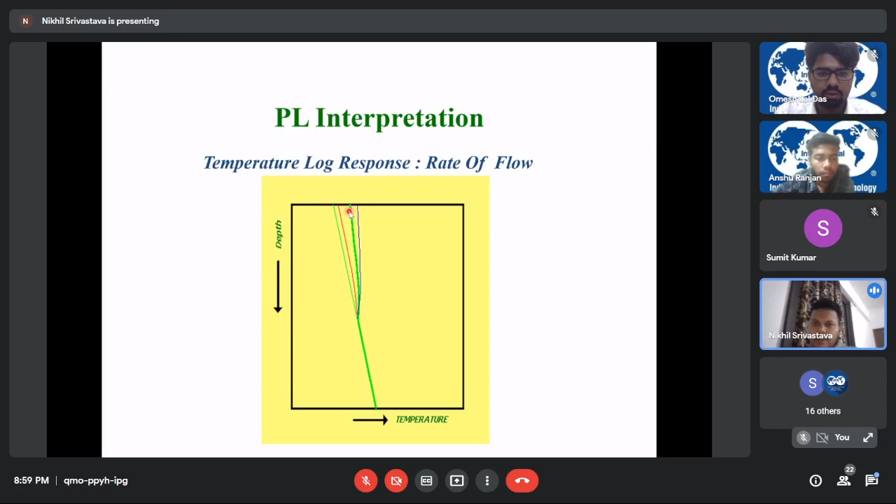They have run several temperature logs in multiple wells, and they identified that for a 10 degree centigrade decrease in the temperature at the surface in the profile, there is this much flow volume decrease. I can give you that equation from some scientists, though I don't remember it exactly, but with that equation you can measure the rate of flow even with temperature logs.

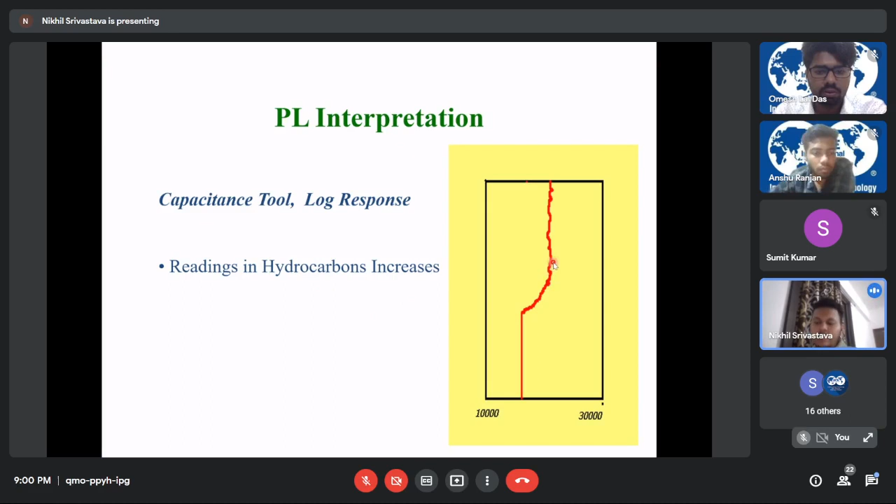So this is the kind of log that we have. That's why I was hurrying, because time is passing by and we have to look at this. See, how would you read this log? Every interpreter has their own way of looking at it, and as a reservoir and production engineer, you will also have your own way.

Gamma is basically for depth tie, so it's not very much contributing here. We would just have to tie the depth with the open hole logs using this gamma, and that's it.

After that, what I do particularly is first look at the density. Density gives us a fair idea of what kind of fluid is in the wellbore. So when I have to make a story and interpretation of this particular log, I will first go to the density log and see what kind of liquid is coming, whether it is justifying our production or not. As you guys have already given the production data, considering you as reservoir and production engineers.

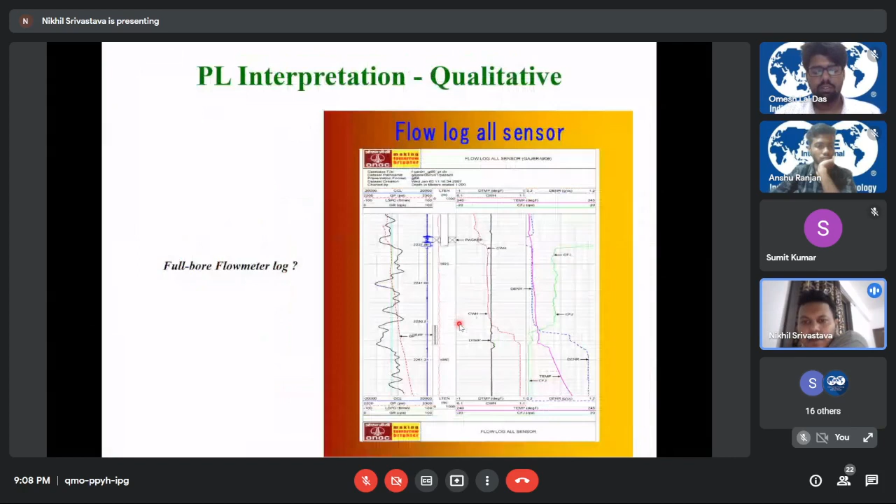Let's come to the other one, that is temperature flow. This log is from this one only, but it has been represented with the full wellbore, to show you guys how it is represented and how the temperature tool stack is recorded. So this temperature would be recorded in first down pass only, no other down passes. This full wellbore stack with 10 feet per minute down pass, this temperature would have been recorded, and other logs can be recorded but there is no need. We record in the full-bore 10 feet per minute up passes, density and other logs like capacitance, water holdup, etc. After that, these all up and down passes are just for this full-bore.

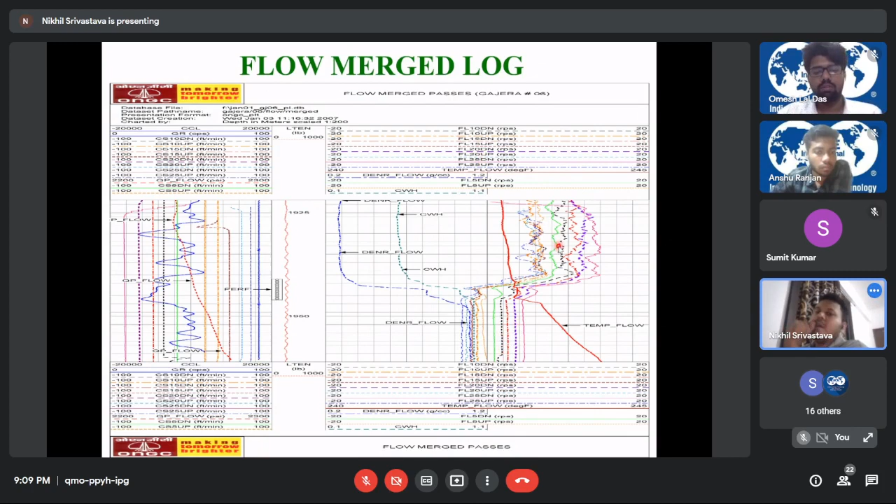To study this and to calibrate it with its calibration that we have shown, whether it is production profile or not, in this case this is the zero line. Here you can see the negative side. So these will all be on the negative side, like when we are having the tool up. So these will all be showing tool up, and these all will be showing tool down. You can see that with the color combination after the presentation is over.

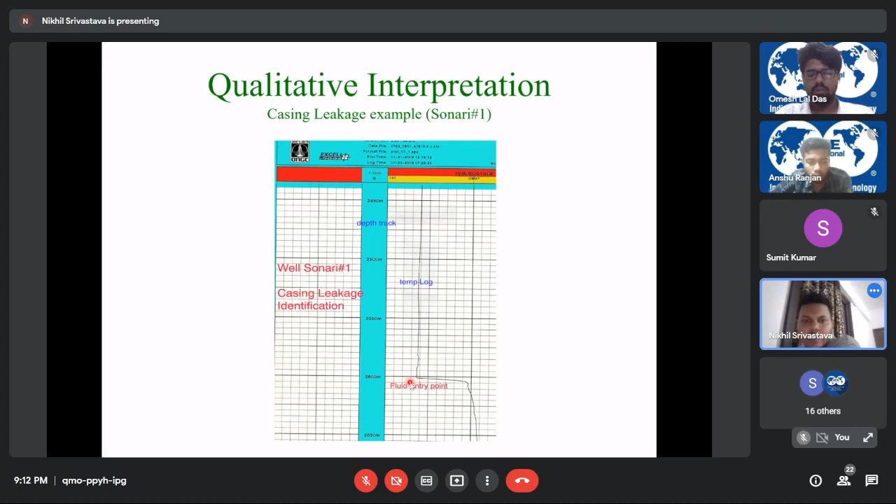That multi-finger tool measures the flux of that material, and with that it gives the image of thickness of that particular zone. So we make a 3D image, and with that we come to the conclusion that it is casing leakage. So the temperature tool had given us a fair idea of the casing leakage.

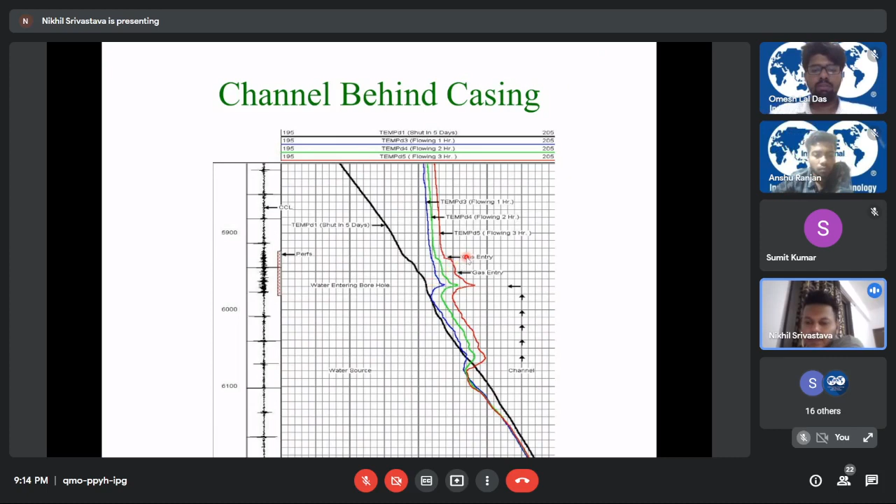This came to the rescue and gave us the answer that some water source is coming from this particular depth of 60, 80 or so, and this is contributing and coming to this zone behind the casing, beyond cementation, due to poor cementation. It is increasing the temperature of the liquid, and once gas is coming out, it is decreasing the temperature, but not as much as it would have been without water channeling. So in that case, gas entry was shown, but not in the manner we would ideally see if gas had come only from the perforation zone.

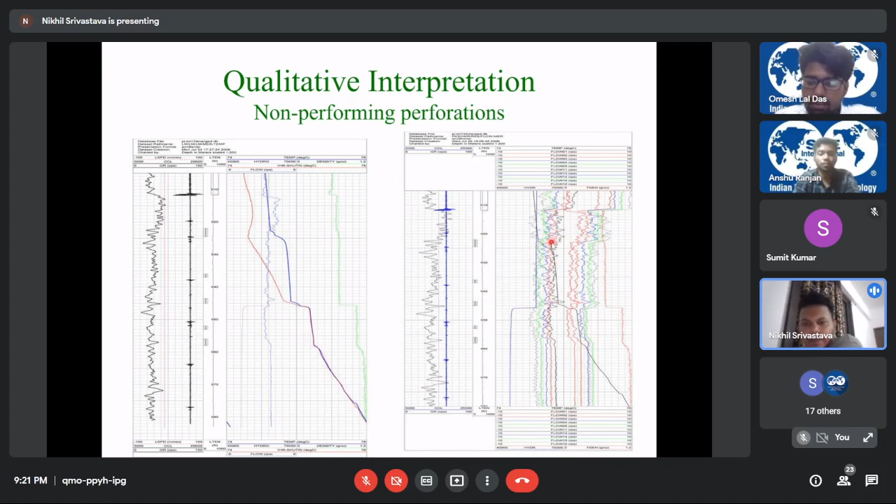And in case of this production profile, it is increasing here and here. So again, I am convinced with this full well bore that it is giving us a very fair idea of which zones are producing.

In case of hydrofrac, you can run it in the pre-hydrofrac and post-hydrofrac time. In the pre-hydrofrac time, this blue line represents the geothermal gradient, and in the post-hydrofrac time, this gives us the idea that fluid has gone into the wellbore quite well, and this vertical projection also shows that vertical fractures have developed. This has gone up to this point, and then it is trying to come back up to the geothermal gradient.

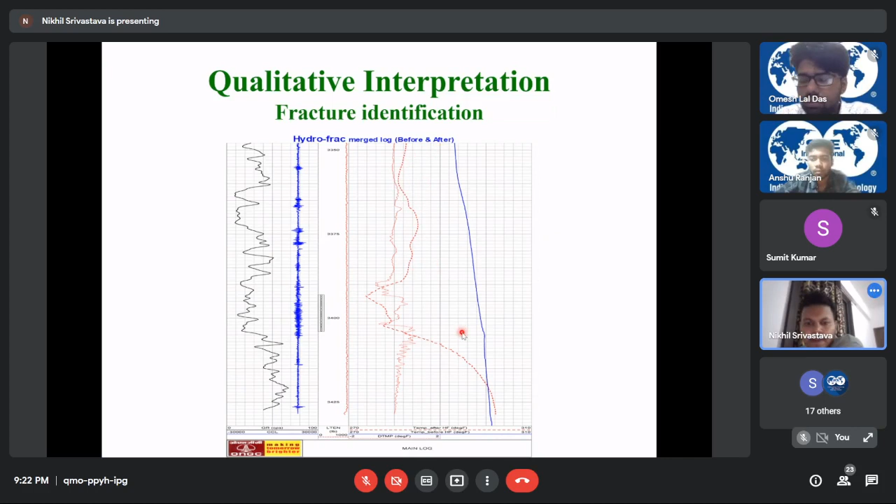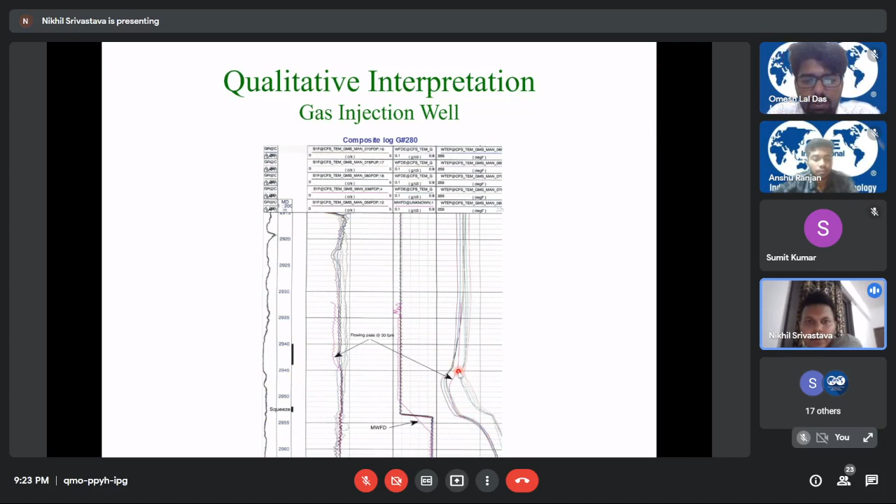Similar is the case with this also. Injection in this particular profile is going well, and this particular zone is where the injection is happening, and density is also showing that gas is being injected. After that, it is showing water or gas mixture, so that's why it's a little bit lesser than 1.

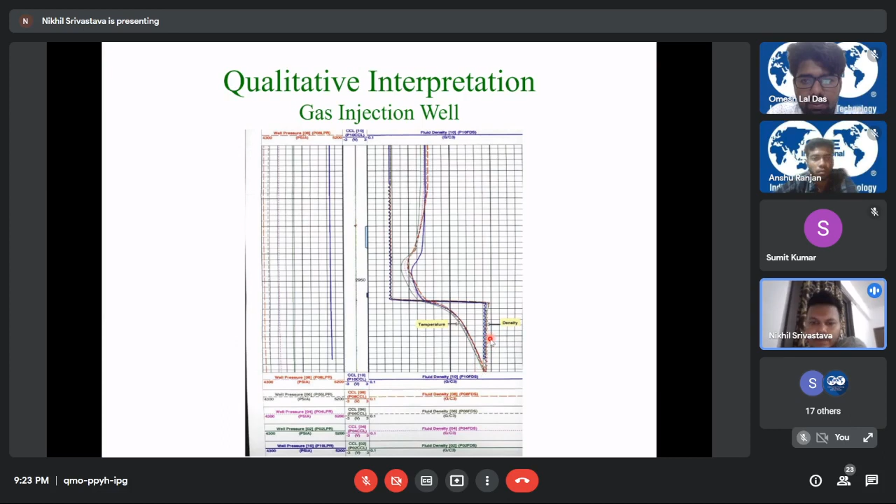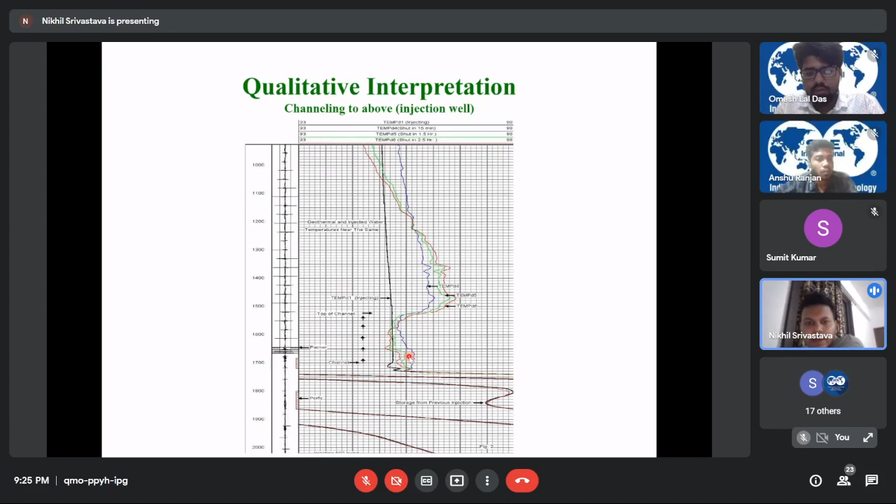So you can infer from this that if the packer is okay, channeling above the injection well - this particular perforated part - the injection is happening in this part, but behind the casing it is going up to the top, and injection is somewhere being done in this part. So the temperature of this part is replicating in this part, and that's why it is increasing, showing an increasing trend, and that's why it can be inferred as channeling above the injection well.